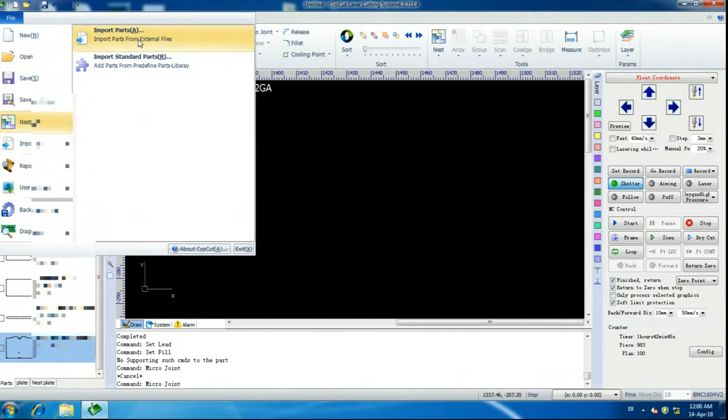So the first thing, to nest a component, we are going to go up to File, go to Nest, Import Parts. I always do everything in DXF. I don't save it as laser documents because I'm always changing how I do things.

So now we're going to select this part here. These names should all be blurred, you know, for a reason. So we have this part over here. That's what we want. We hit open.

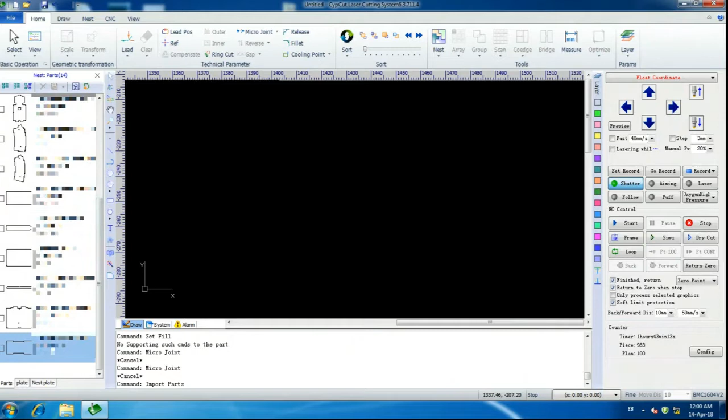Now, I've already done this a bunch of times. This whole sidebar is full of components. So now we're going to right-click on our part and click Edit Parts. Now here's where we're going to start setting up the component. So the first thing we're going to do is select whatever we want to edit.

These top icons up here are only going to have effect on whatever's selected. So if you only want to do, say, certain geometry, like holes inside, you want compensated or different leads, then say outside geometry, just select what you want and then select the outside to edit that part.

So the first thing we're going to go ahead and do is hit compensate. Now I'm going to show you how to calculate this in another video. Basically, you just cut a square of a known size, measure it, and then add on half the amount that it is different. I'm going to check all expand.

You can do inner mold, shrink, outer mold, expand, but for certain configurations of the way I do things, that doesn't work. So I select either expand or shrink depending on what I'm doing. So outer geometry, we expand.

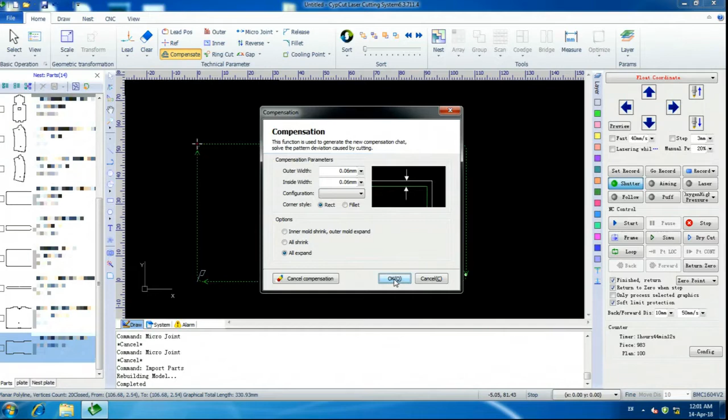Hit OK, and as you can see, it has now drawn a second line at an offset distance that I determined, and that white line is where the center of the laser beam is going to travel, and this is going to be the edge of what gets cut.

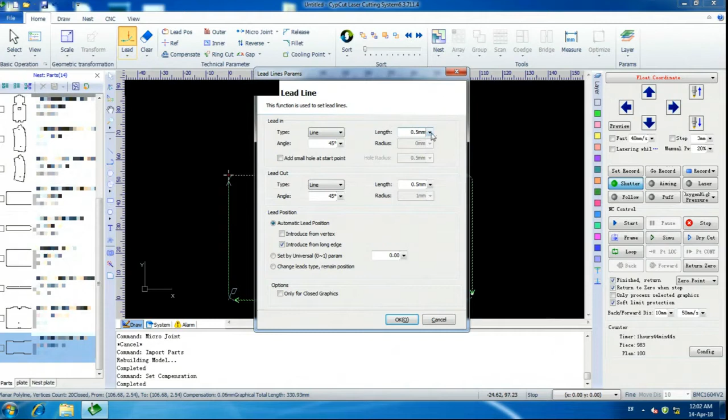So the next thing we're going to do, we're going to set up our leads. Now I got kind of this funny recipe I like. I use lead in line, 45 degree, 0.5 millimeter length, and lead out.

We hit OK, and we're going to change the lead position. So that's this button here, and we're going to select right here. Now if you look, I've got these 45 lines going out.

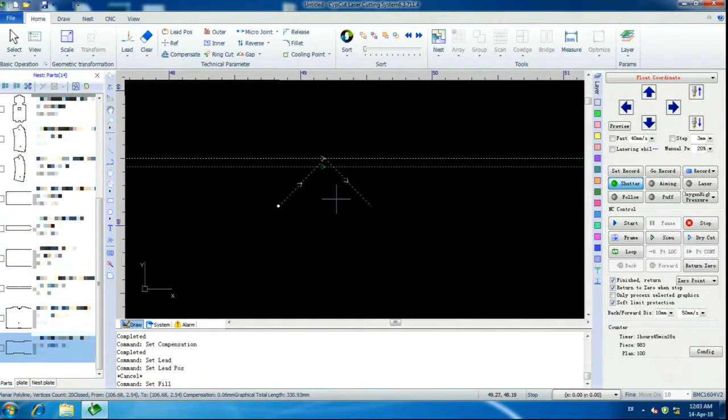What we're going to do is select inner. That's going to flip it. Now, if you had set your compensation up to automatically find inner and outer, it would flip your compensation, which is why I tell it specifically to expand the compensation instead of letting it figure it out on its own.

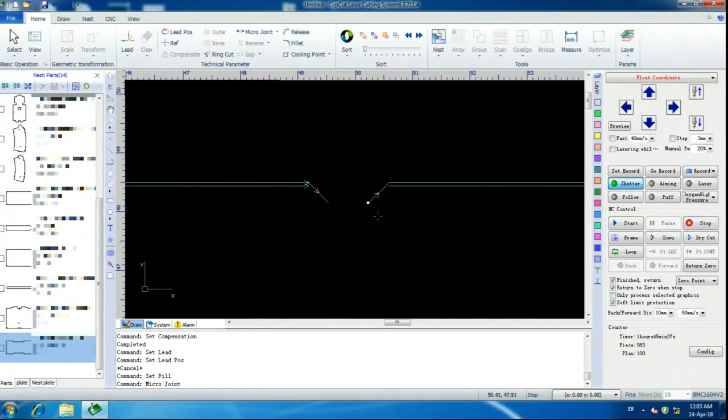Then finally we click micro joint, and for some reason it doesn't select on the white line. You got to go to the line that's your actual part, select in between these two, and I like 1.4 millimeter. Now what this is going to give you is about a 0.6 millimeter gap in between here, and it's going to start the laser inside of the part, and then it's going to end inside of the part.

So it breaks off clean. Well, it's not perfect, but at least the spur isn't sticking out, which will throw off dies and tooling. Your choice on how you want to do that.

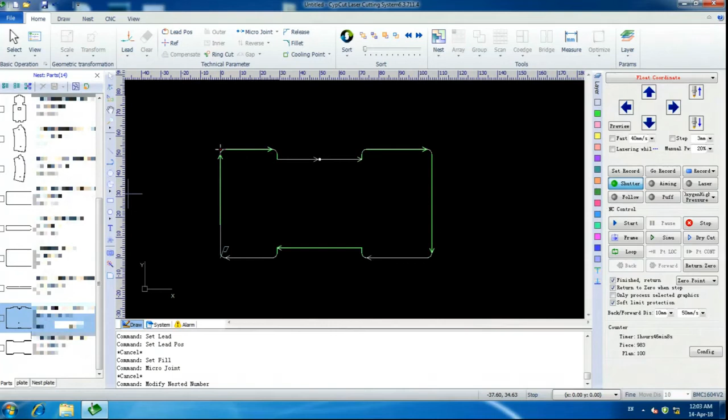But now this part is set up, so we're going to come over. We're going to select how many we want, and I want 500 of each of these parts. Check the little boxes that we want them.

Alright, so after you have all of your parts, your part numbers figured out and dialed in, you can go ahead and click this button over here that looks kind of like a puzzle piece. And you're going to go, in this case, selected parts.

And I use standard plates. In my case, they're 1215 millimeter by 1215 millimeter, which works out to about 4 by 4. Plate thickness, plate material, really doesn't matter.

So now we're going to look at part gap. That's the space in between the components. 3 millimeter works for me and my thin material. Plate margins, 4 millimeter. That works because that's about the width of the laser dot for setting up. So it's good to have a decent margin on there. I'm letting my rotation angle be 90. You could do 45, 180, and then this is do not rotate in Chinese apparently.

90 works. 45 starts adding more potential options for how it can rotate a component, so I just like to leave it at 90.

Auto optimize, I'm not actually sure what that is exactly.

Remnant will cut the sheet off. Be careful with that. If you set your sheet sizes wrong, it will cut off the sheet, so be careful with that. I've used it a few times, but I don't use it too much. Usually I'll just cut it off with a pair of shears.

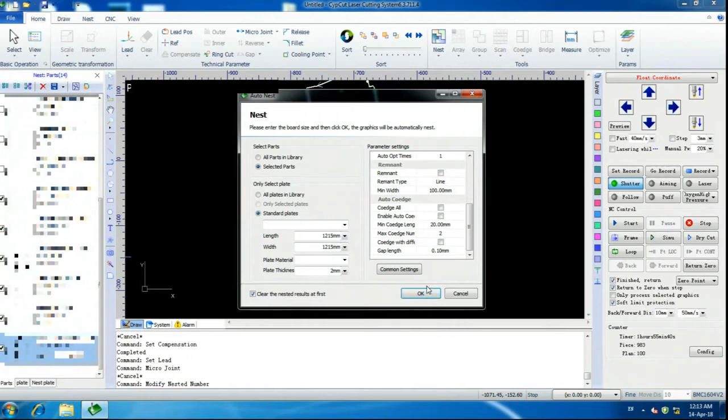Max co-edge number, but I don't have co-edge on because my parts require a high level of accuracy. If you have co-edge, it really doesn't use your compensations, so I don't like using it. You can if your parts don't need much accuracy, but then why are you running a laser?

Okay, so we're going to hit OK, and it's going to start arranging the components onto sheets. And so a few little notes while we're waiting.

The limit on how many components you can nest is 999 per component. So if you're doing more than that, you might look into either doing batches of components or using an array copy if the part is so small that you're making that many.

The other limit is you are limited to 20 sheets. That is regardless of the size of your machine. So on a little 4x4 like this one, it does start to become a little bit of a problem.

Okay, 2,100 pieces, 2,144. That does not seem like the full number of the components I requested. So I think I hit the limit of how many parts I can do.

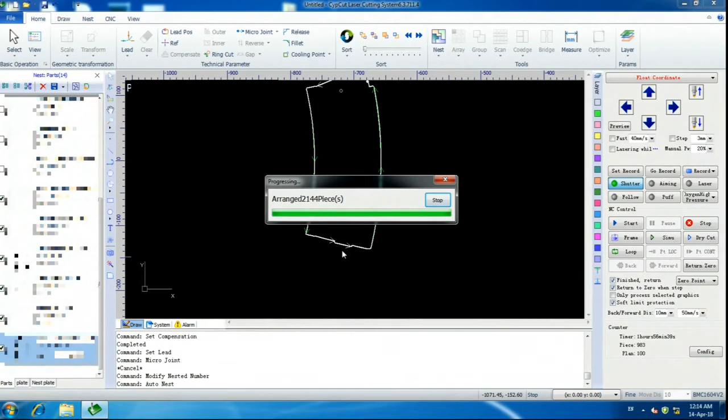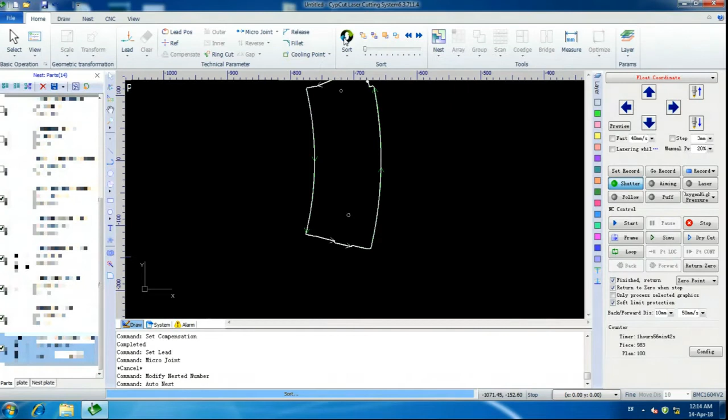Oh, another thing to note, that 45-degree internal cut that I did, where I told it to cut inward, if you touch the sort button, that's this button up here, if you touch that, it's going to flip it back to the other way. It tries to save you from yourself, but that is an important thing to note because it will put all the bumps outside.

Alright, hey, look at this. Okay, so nest plates. So hey, 19 sheets, that's perfect. So yeah, hey, there we go. That is about almost 90% utilization of the material, and as you can see, it only took a minute.

So the other little warning I have for you guys, and we keep making this mistake, is you have to manually switch to the next sheet each time, and I have been forgetting to do that, so I end up with like 30 extra components. So let's go ahead and load up the first sheet and we'll start cutting.

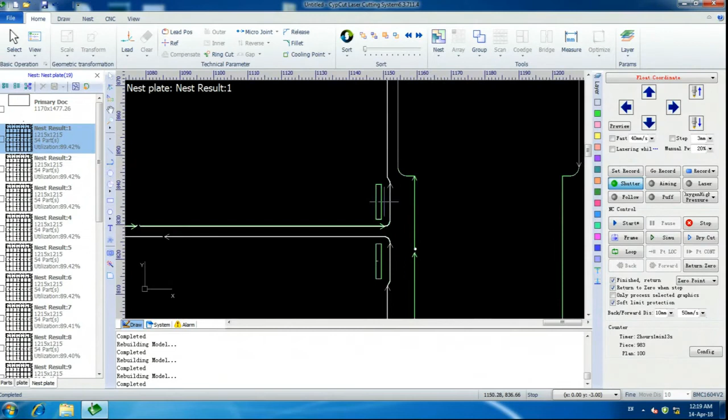Just a little mention, you guys, if you do really small parts, geometry like this square is only about just over 1 millimeter wide, or about 50 thousandths of an inch. When it cuts around, it's going to blow out, and sometimes it hits the edge of the nozzle, which causes a capacitance error. Just something to be aware of. Your machine's not broken, it's just parts like this really mess it up bad.

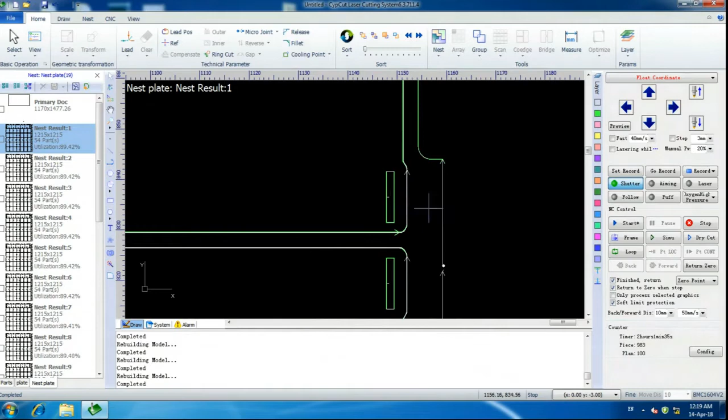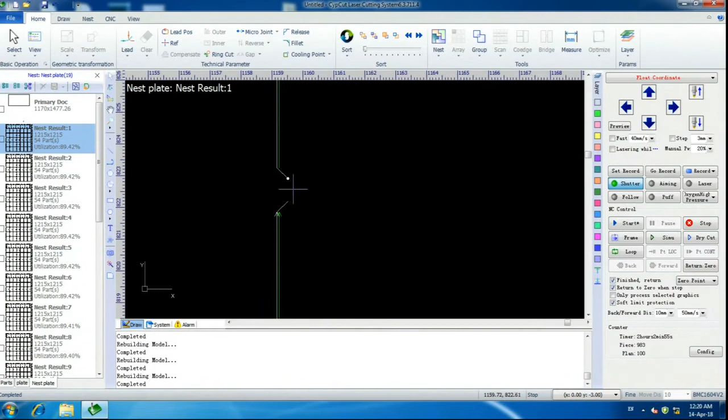Another little thing I wanted to mention real quick. Here's a great example of why owning your own laser is a big advantage. This component right here, this kind of rectangle, actually goes through another shearing operation. Now, if I was job shopping this thing out, the job shop's not going to know that. So I know that I can leave a gouge in the side of the component, and it doesn't cause any problems because this all gets trimmed anyway at a later process.

So you can do that with a lot of things. This section of this component will be buried underneath another part, so you won't ever see that notch. And that's just one of the many advantages of owning your own laser.

So we're going to go ahead. I've already set the sheet. I'm just going to hit start here instead of using the remote. And Mike is going to turn the fan on. Thank you.

And we're off. You can see live speed of the machine cutting right here. That red X is where the position of the center is. In that corner. Yeah, there usually is.

You do have a certain throwaway rate on components. It's just you don't get 100%. You end up throwing away not a ton of parts, but a fair number of them. About 2% or so, but I'd say between 2 and 5% if it's running decently, depending on the complexity and your level of requirement.

Capacitance errored out. Yep. All right. So what we do then is we don't do anything. We just hit resume, and boom, we're back to cutting again.

It does this a lot on this component. I don't think there's really a good way to fix it, so that's just what it is. Primarily because it's such a large square chunk coming out of it. It somehow always bumps up and hits the nozzle. There's just no way around it.

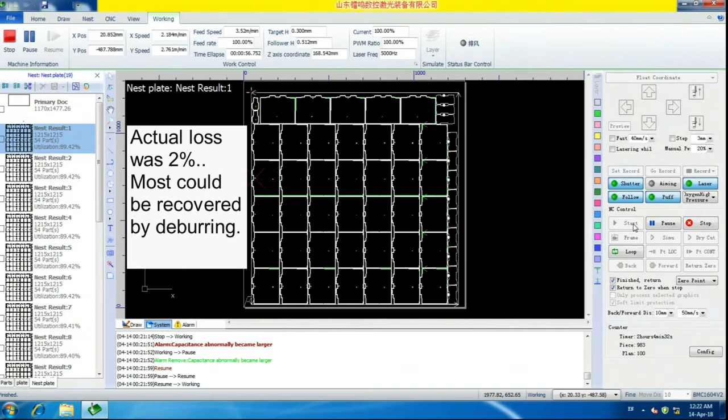So, all right, we're going to turn the video off at this point. These are the components after they came out of the laser cutter, and you can see they're hanging on. We're able to handle them and move them out of the machine. Takes a couple wiggles and the part comes out.

And the edges, that little gap is more or less smooth. This one's a little bit of a bump, but this one is flat with a little nick in it. Yeah, it's almost minimal. It's very minimal. Same thing with this one, there's a little nick in it, but otherwise the parts come out.

And at this point what we do is we take them out onto a flat table with heavy cardboard on it. That's basically other sheets, this is 16 gauge underneath it, a stack of it, so you can get the sheet nice and flat and wipe it down to get the cutter dust off. Flip it over, repeat wiping to get the cutter dust off, and then break all the components out and stack them.

As you can see with the nesting software, it generally goes from largest part to smallest. So this is the biggest component that we have. It fills the sheet as much as it can, and then fills in the edges with the next size down that it can.

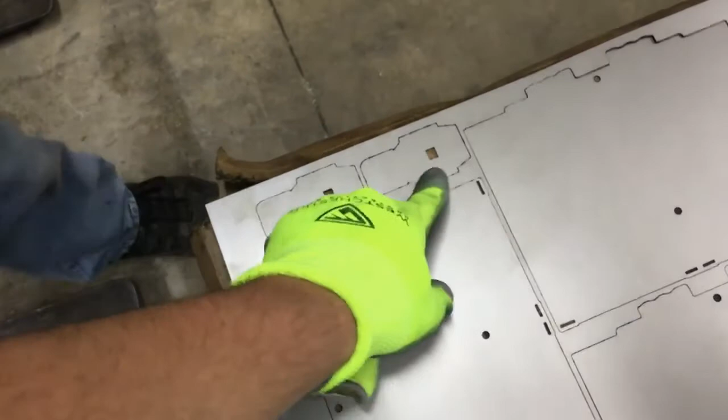And as you can see, right, where was it? Look through the camera. Right here, it couldn't get one of those other parts on, so it put one of these smaller pieces in. And here's another little note.

Even if you got your stuff dialed in really well, you should still expect occasional bad parts. This one's going to get put in the reject bin, and then we'll add it in at the end on the final sheet. Anything else?

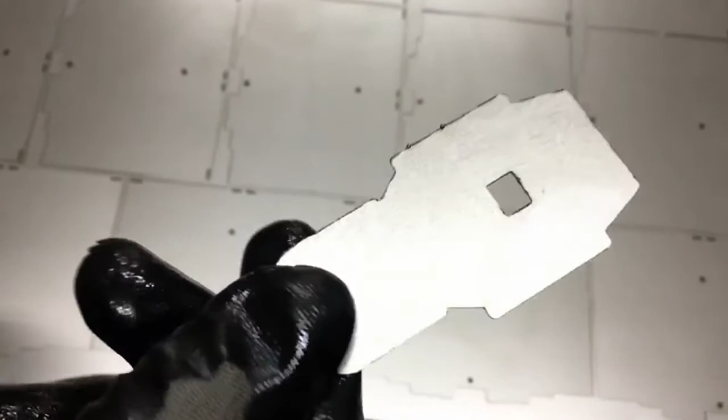I'll just show the problem there. Yeah, you can see that's not ideal. But what it is, the sheet vibrated. Nothing to do about that. It's not the laser's fault.

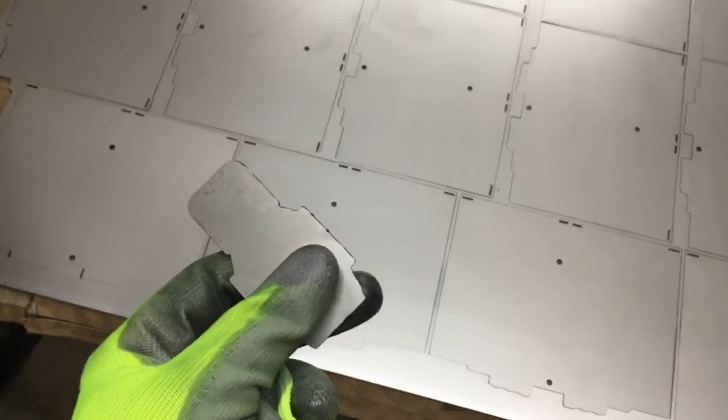The edge of the sheet was floating a little bit, and when you blow air on it, it starts flapping, and the machine just simply can't keep up with that. But the vast majority of the components are perfect, so that's all we really care about.

All right, we've just finished cutting our first sheet. We've reloaded the machine with a new sheet and set its location using the remote control. Now, this is very important to remember to do every time: click to the next sheet.

Now, if you're not sure if you've already done this or not, go ahead and click to the next one. If this stays white, it hasn't been done yet. So just keep that in mind.

As a note I should have mentioned earlier, when you're setting up your parts, you don't set up your feed rates and your speeds in that screen. You set them up here in the nest plate area.

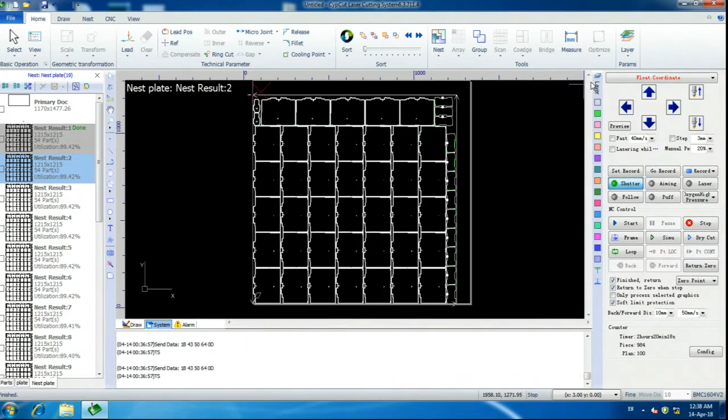You click layer, and it's going to be the color of your part. I only have one layer here, obviously, and this is where you set up your stuff. More on that probably in another video.

You'd click load, select the material from a pre-saved list that you would make up at a different point in time. Set up your focus, your air pressure. These are so I remember my gap and my 45-degree lead in, lead out with 0.5 millimeter lead.

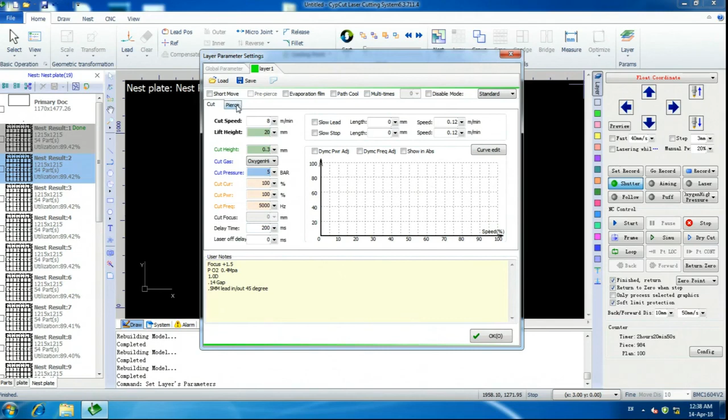That's that one I showed you earlier. So these are my settings: no pierce, cut. Just pause the video if you want to look at it. All right, so that is where you would set that up.

You'd set it up before you start cutting the first piece. I already had it set up, so that's why I didn't do it.

Okay, so now we have clicked on to nest result number 2. We are going to click the start button, and it is going to start cutting the second sheet. And then we will repeat that for all of the sheets that we make.

Now, if you forget to do this, you can cut a piece multiple times, as many times as you accidentally keep cutting it. So we've ended up with extra parts a few times.